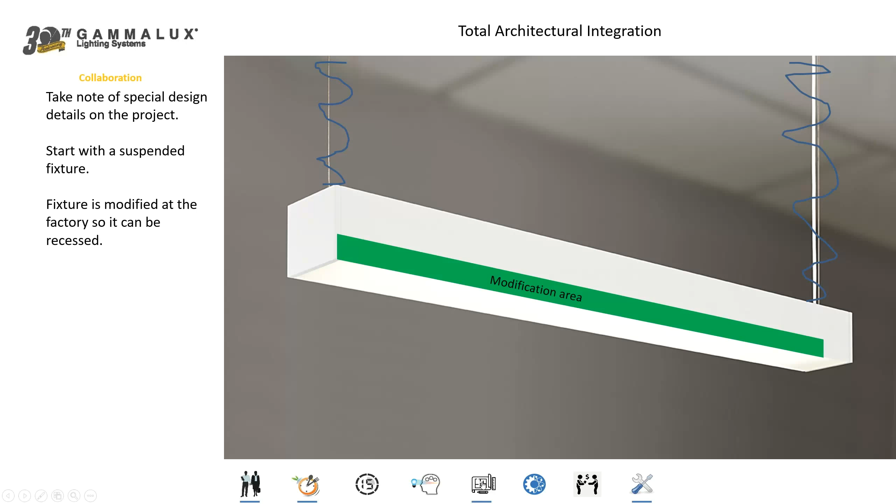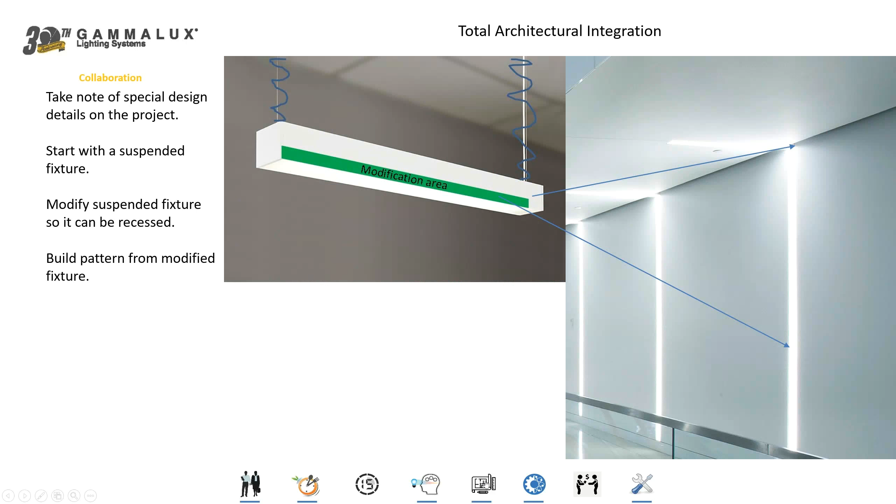And so now, when this pattern of fixtures is installed, the portion of the fixture that's visible inside the 3-inch gap is the nice smooth side on the housing, rather than grooves and flanges and holes and brackets and things of that nature. And of course, when we build the fixtures, we want to be careful for something like this.

So we recommend when you're specifying a pattern of fixtures, don't specify a fixture to be recessed in the wall and a fixture to be recessed into the ceiling, because this is something that you're going to end up with similar to this, where it's up to the contractor to try to figure out how everything goes together.

What we do, instead of providing two distinctly different fixtures, we actually provide an L-shaped fixture that comes up the wall and comes across the ceiling about 6 inches or so. We make that as an L-shaped fixture, like a hockey stick, at the factory, out of that modified suspended fixture.

And then about 6 inches away from the wall, that's where there's a nice, very simple butt joint that the installing contractor will work with in order to finish off the pattern of fixtures. So we're going to give the contractor the most simple form of installation possible while still maintaining the original design intent in the space, while also avoiding the problems of using a product that should not be visible on the sides of the fixture.

So again, total architectural integration requires a lot of collaboration with us, the specifier, and of course the installing contractor as well.

Now, when we're dealing with very complex patterns of fixtures, you can see here in the reflection in the glass, this is one pattern of fixtures weaving its way through the entire building, through the whole floor of that building. If you think about this big complex pattern, obviously there are a lot of parts and pieces associated with it, but we don't want to leave the distributor or the contractor in the position of having to order and figure out all those parts and pieces.

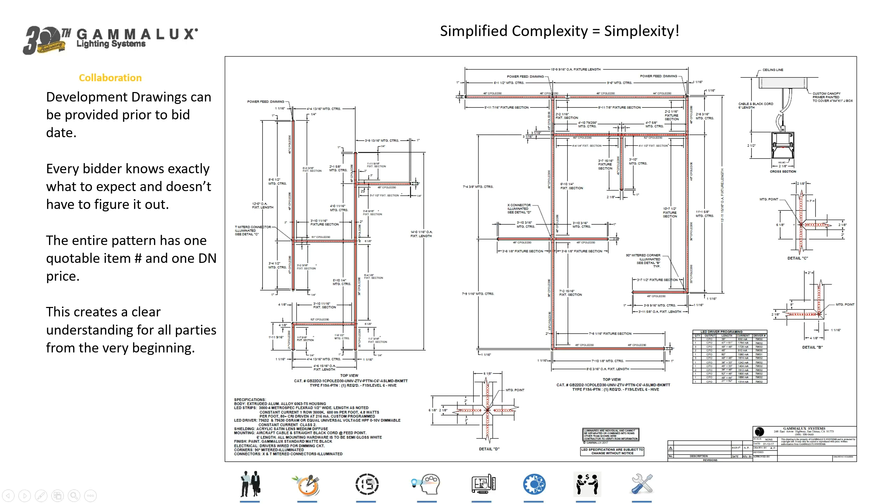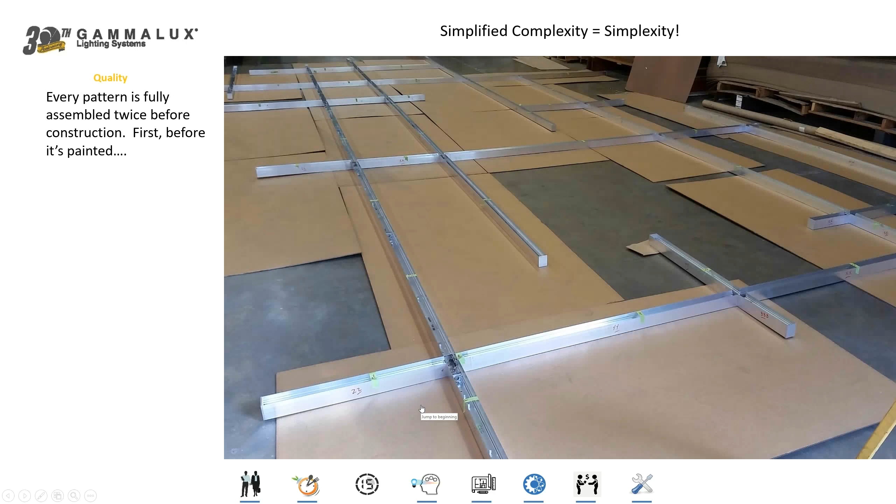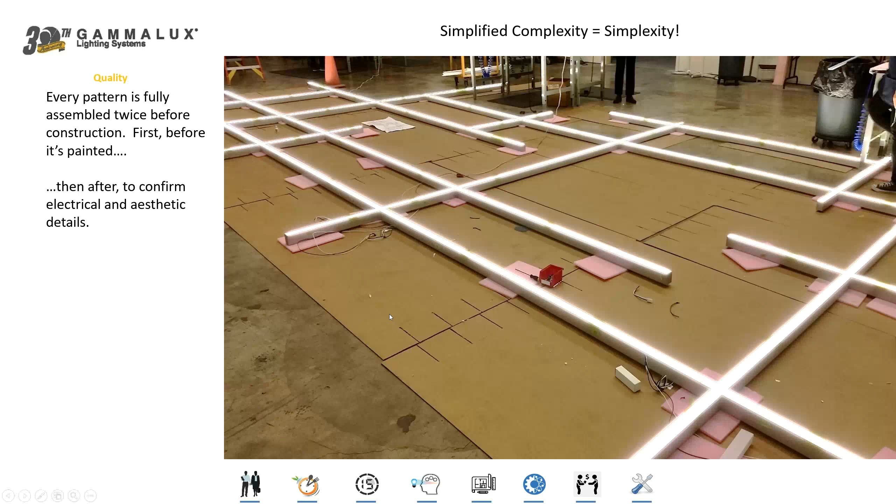Now, everything we build at Gammalux is actually fully assembled twice. First, before it's painted, to make sure all the joints line up properly, all the locking mechanisms work the way they're supposed to, all the dimensions are correct. Then we take the entire pattern apart, paint it, put in the electrical, and reassemble the entire thing, checking all the circuits, all the battery packs, making sure the housings are painted consistently from one housing to the next, and making sure the lenses are fully illuminated. We're checking not just the performance characteristics, but also the aesthetic characteristics of these patterns of fixtures before we pack and ship them. So we're very thorough in our methods.

Now, if you want to have fixtures embedded into the walls, usually you don't want to see that visible flange that goes around the fixtures, that visible framework, if you will. So you specify what you call a flangeless fixture. Well, the flangeless fixtures really do have a flange on them, but they're a mud flange. It gets mudded over and painted so you can't see it. And we have the same thing as well.

But we have an element in our mud flange fixture that nobody else has, an expansion gap. We include an expansion gap of about a 32nd of an inch as part of the construction of our fixture to separate the housing from the mud flange. The reason for this is because when the lamps come on, they're going to create a little bit of heat, and this is going to heat up the housing in relation to the surrounding wall, and any material that heats up expands. So by having an expansion gap separating our housing from the mud flange, whether the housing expands or even if the walls expand, the two won't be putting pressure on each other and creating cracks surrounding those fixtures. This is why we operate the way that we do, why we use the kind of components that we do, to ensure the aesthetics are good for the duration of the lifespan of that building.

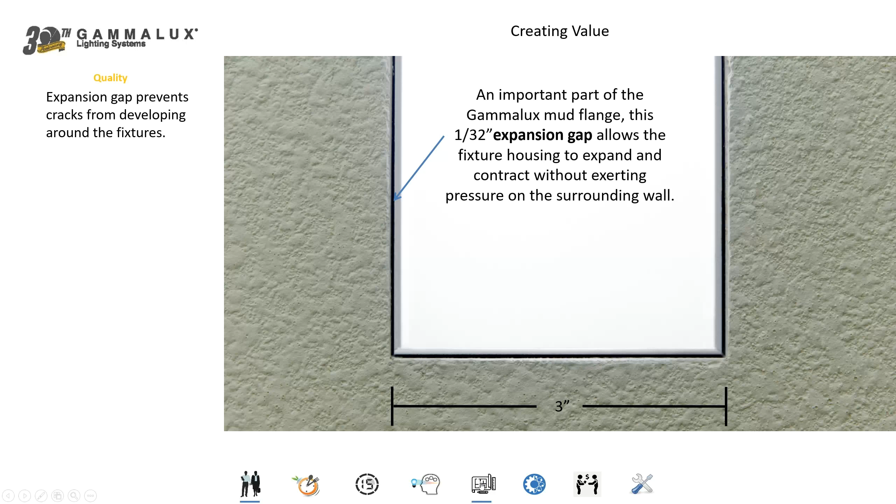Now, this is not a back box or something the installing contractor has to figure out on their own. This is our own construction, so it's not something they've got to try to figure out how to put together.

Now, normally speaking, we would put our mud flange around all four sides of our fixture if it was ordered with the mud flange. But the problem with that is you would see the mud flange in the gap between the fixture and the mirror, and obviously that's not something you want. So now it would be the installing contractor's responsibility to pull that mud flange off the bottom of the fixture, fill in the holes he's created, and then try to find the right color of touch-up paint to fix the mess. And certainly that's something we want to avoid.

So with proper collaboration with the designer, when we find out there's supposed to be a half-inch gap between the mirror and the fixture, all we'll do is put our mud flange on the top and the sides of the fixture, but not the bottom. By doing that, we modify the fixture appropriately for that particular job, and we do those modifications at no additional cost.

Now, if we're building fixtures all the way around all four sides of the built environment, obviously we have to have exact field dimensions for that kind of thing. We quote to CAD or designed dimensions, but we do not build to designed dimensions because we know the walls will not be built to designed dimensions.

Once the stud framing is up, the contractor knows what the thickness of the gyp is going to be, and then they can extrapolate what that corner-to-corner dimension will be, and that's the dimension that we need on our signature-approved shop drawings before we go into construction of these fixtures.

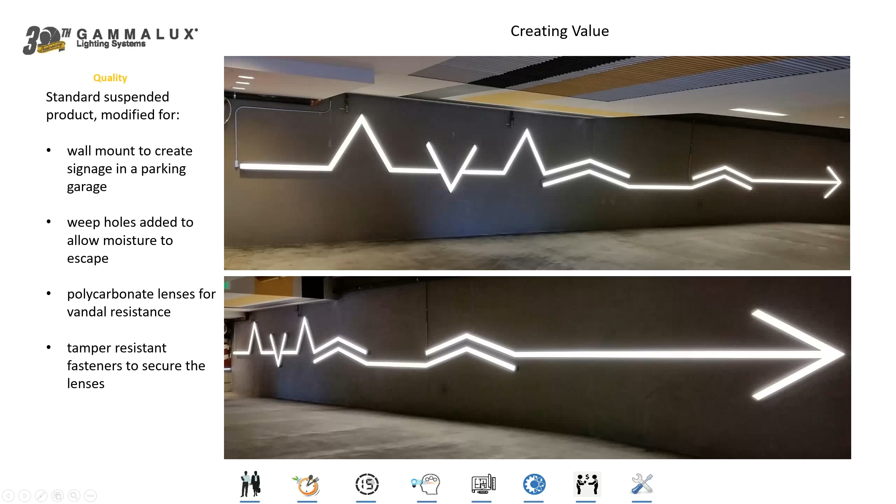All of our fixtures can be built for individuals, in patterns, or in continuous runs. Obviously they have to be ordered that way so we can put the right components into the ends of the fixtures. But when you specify a run of fixtures for continuous run illumination, we're going to let them be continuously and fully illuminated.

There aren't any shadows in the middle where two different housings were joined together and there's a gap in the LEDs, or maybe even shadows at the end. We don't do that kind of thing. We always fully illuminate our continuous runs of fixtures.

To my knowledge, we are the only manufacturer left that can actually make one housing up to 24 feet long, all in one piece. I say the last manufacturer left because a lot of manufacturers used to be available to do this kind of stuff. But as they get bought up by the conglomerates, very soon all their special characteristics and capabilities go away, and they just become another one of the herd.

So Gammalux is a family-owned company, privately owned. We're not for sale, and so we still have all these great capabilities that help you to do creative things.

Now, in a case like this where you're working with a tall rectangle, there's a lot of rigidity to that kind of housing, so we can support that entire 24-foot housing with just two support cables. So you're cleaning up the ceiling system, and obviously it's very aesthetically pleasing. You're eliminating any gaps or light leak because there is no multiple housings being joined to create gaps and light leaks.

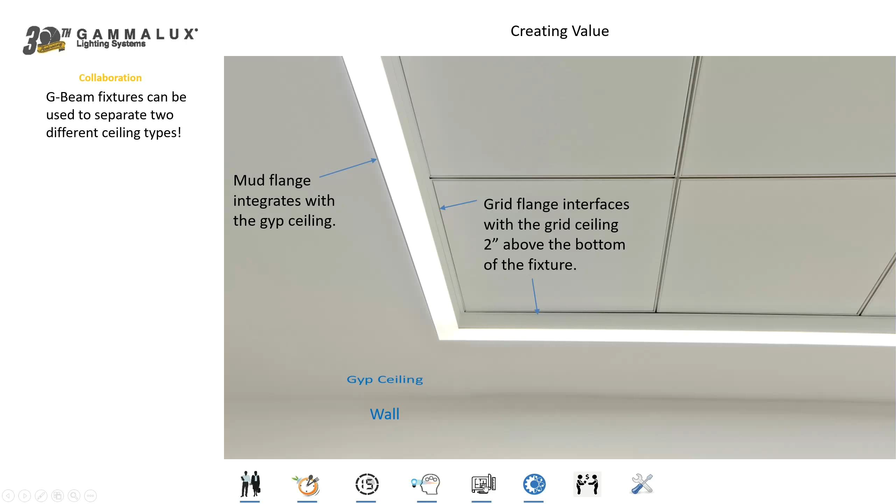We can make wayfinding applications as well, where we're coming up the wall, across the ceiling, and then shooting down the corridor, also at any angle. You saw that AVA pattern where we're doing multiple different kinds of angles, not just 90 degrees and 45. So we're not bound to just those two angles.

Now here's an application where we took our fixtures and actually created steps in the ceiling, coming up to the center and then back down to the other side. If you think about a step ceiling, there's a lot of complexity probably involved in stuff like that, certainly a lot of hands in the cookie jar because everybody thinks they're going to make a lot of money on this custom application, and that's just not. It doesn't have to be that way.

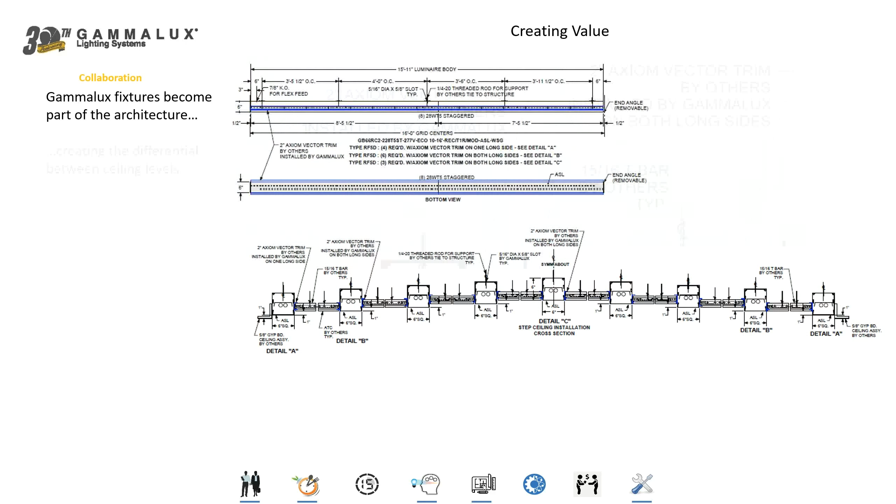What we did here is we found out what the ceiling system was. This is the Armstrong Axiom ceiling system, which uses an extruded aluminum C-shaped channel that gets installed up against the walls at the ceiling line. Then the grid snaps into that C-shaped channel and slides along until it's in the right position, and then they drop in the tiles.

So what we did is we got a hold of that C-shaped channel called the vector trim, and we attached that vector trim to the sides of our fixture at the factory. Of course, everything was cut to the same length and painted with the same paint, so it all looks like one comprehensively designed unit.

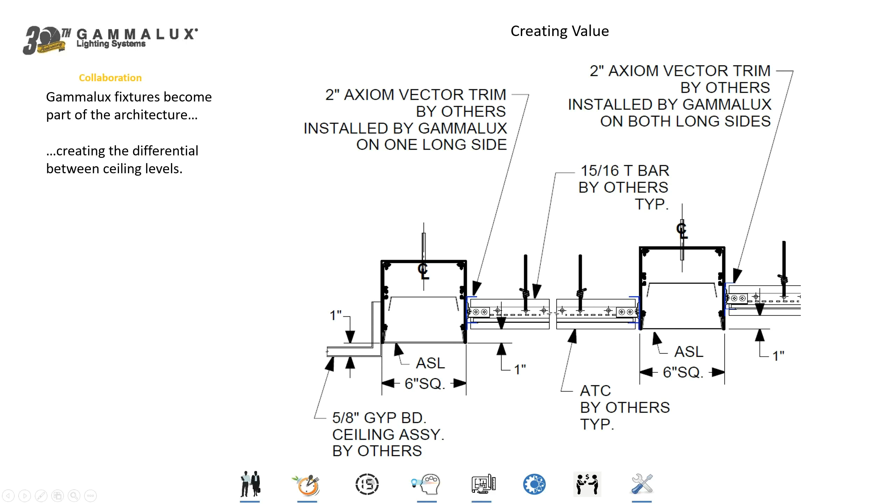Now, when the fixtures arrive on site, the installing contractor supports those fixtures and suspends them at the right locations, at the right height, and then the ceiling contractor gets in and just snaps the grid right into the sides of the fixture. The grid is supported independently, the fixtures are supported independently, but they're all interfacing with each other in order to create a beautiful installation without any of the custom dollars associated with a custom step ceiling.

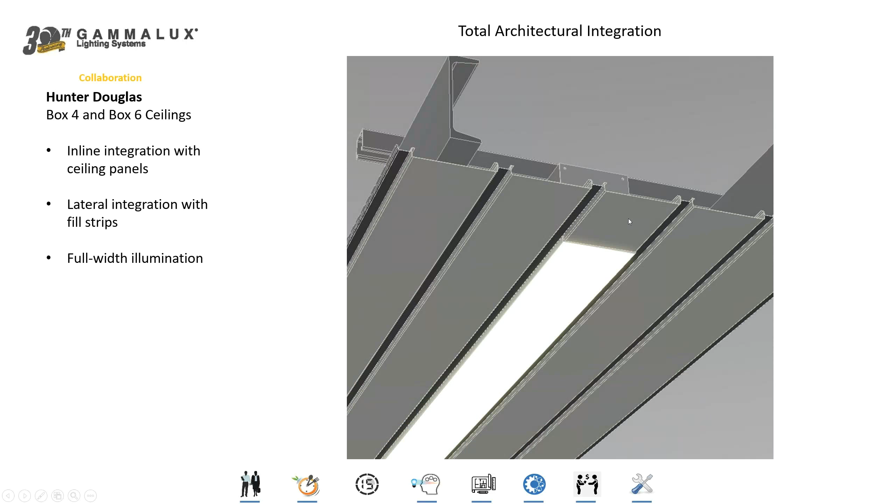This is the Hunter Douglas Box Series metal ceiling system where they have nominal 4-inch and 6-inch panels. We've made our fixture the same width as the panels, and we have a joiner spline in line with our fixtures so it interfaces with the cut panel at the ends of our fixtures. So the fixture itself becomes part of that ceiling system in a fully integrated way.

We actually use the same brackets on the top of the fixture that the panels require so that everything fits together in a kind of a cohesive and complete way.

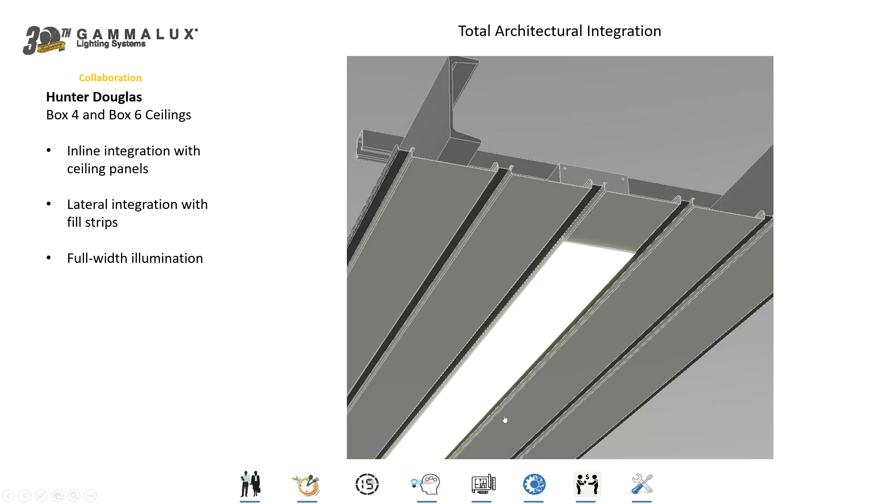Obviously, you want to avoid this kind of thing, these one-size-fits-all solutions that don't really work out, because the truth is one size only fits one, and the rest are compromises. Gammalux wants to understand what kind of ceiling system you're using and even what kind of grid you're using so that we can build our fixture to the proper dimensions to avoid this kind of aesthetic problem.

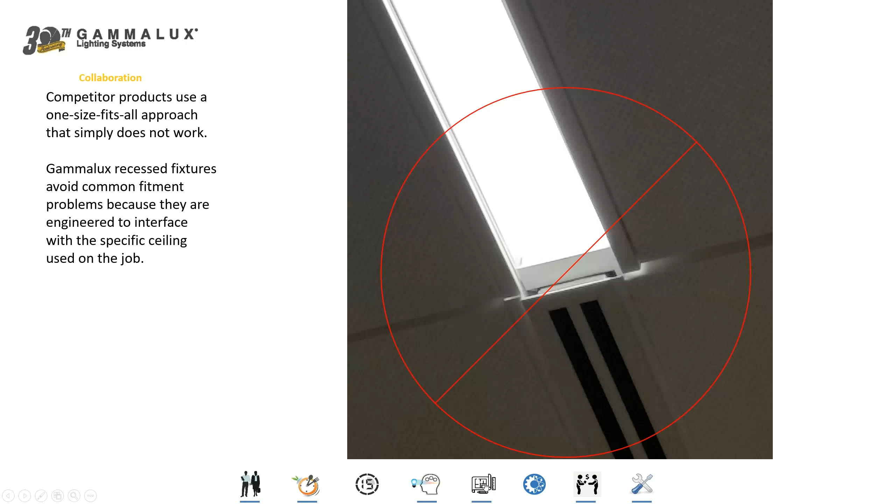Now, we offer fixtures of multiple widths, and if you'd like to use fixtures of different widths on the job site, you're also going to get different apparent brightnesses. So what we can do is offer to custom program the drivers in all the fixtures to equal them out, so you get the same apparent brightness throughout the entire job.

We will custom program our drivers either for a certain level of output that you want or for wattage restrictions that you have to comply with, and we do that custom programming at no additional cost.

So we can make all of our fixtures suitable for damp location, but we do not offer wet location or natatorium or indoor pool type fixtures, because the chemicals will just eat right through the housings, the drivers, the LEDs and such. So those are really the only two things we don't do: wet location and natatoriums.

Now, wall washing is a very important part of good design. Obviously, if you have an object wall, you want to illuminate that properly. So we have a kick reflector on the bottom of our wall wash fixture that actually illuminates all the way to the top of the wall.

This eliminates that shadow that most of our competitor products have. Also, that kick reflector acts as a glare shield so people inside the room can't look into the fixture itself. You have to actually be below the fixture in order to see into it.

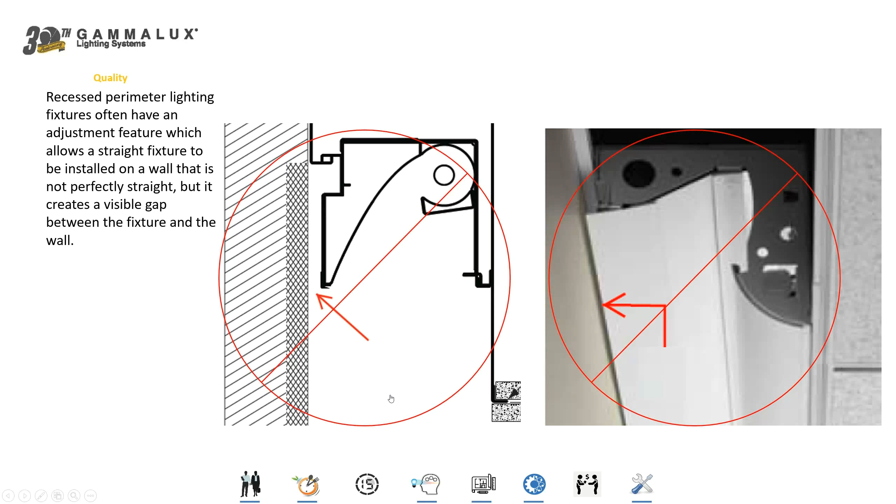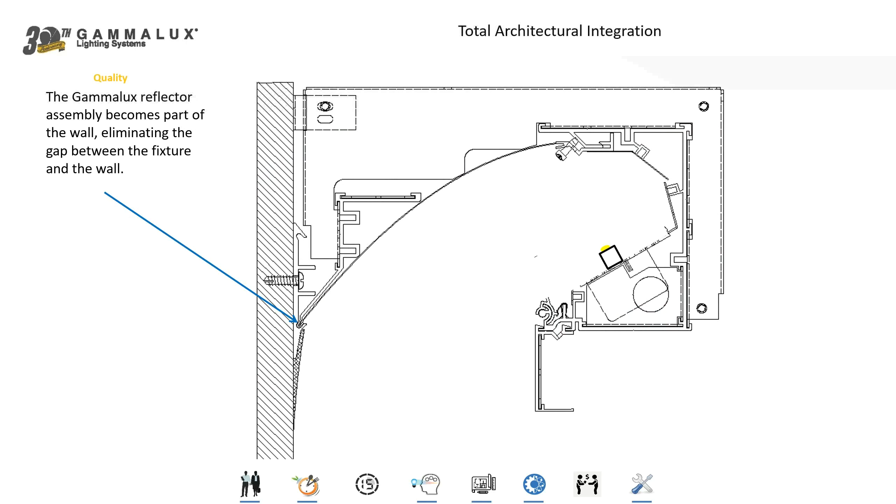So what we've done is developed what we call a mud flange for the perimeter series. This mud flange gets mudded over, and you can see that it's attached to the face of the wall just above the ceiling line, a couple inches above. That mud flange has a groove in it ready to receive the reflector assembly from our fixture. This eliminates that gap that's often, all too often, visible between the back of the fixture and the wall.

We have two types of illumination. We offer grazing illumination and ambient illumination for two different purposes. Grazing illumination shoots light straight down the wall, so you get shadows on even the most shallow texture in the space. But be very careful.

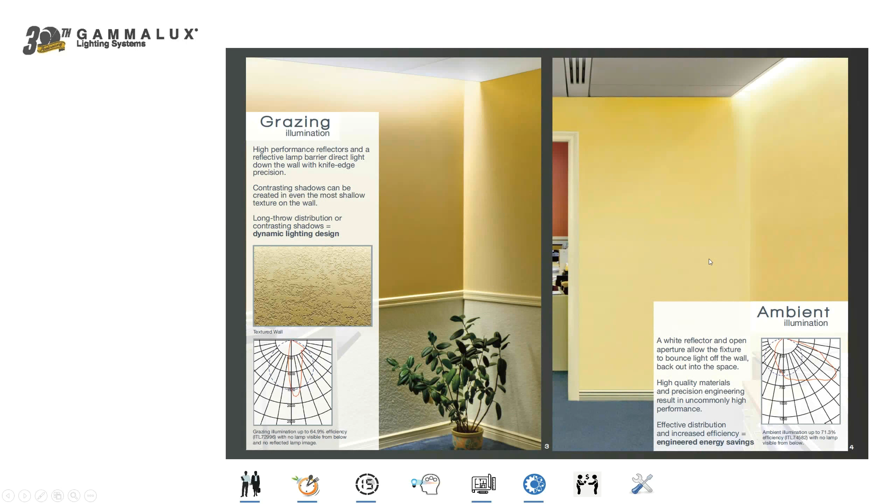Do not use our grazing illumination fixture on a flat wall unless you know that it's a level 5 finish. Obviously, if there's texture on the wall, you're going to create all those beautiful shadows on that texture, the brick, the stone, and such. But if you've got a flat wall that you don't think is going to be perfectly flat, do not use our grazing optic because you are going to highlight every dimple and pimple on that wall. Instead, use our ambient illumination fixture, which uses the wall as a reflective surface to bounce light back out into the space rather than shooting light straight down the wall.

We've also reintroduced the round fixture back into the world of lighting. It was gone for about 15 years or so because everything turned to squares and rectangles. But styles change, and certainly geometric shapes like circles are never going to go away. So we've reintroduced our round fixture.

We've given it rotation capability so it could be aimed wherever you like in the field. Each independent section can also be separately rotated from the others, so you can have some facing left, some facing right. They're fully rotatable 360 degrees, so you can aim them pretty much wherever you like in the field.

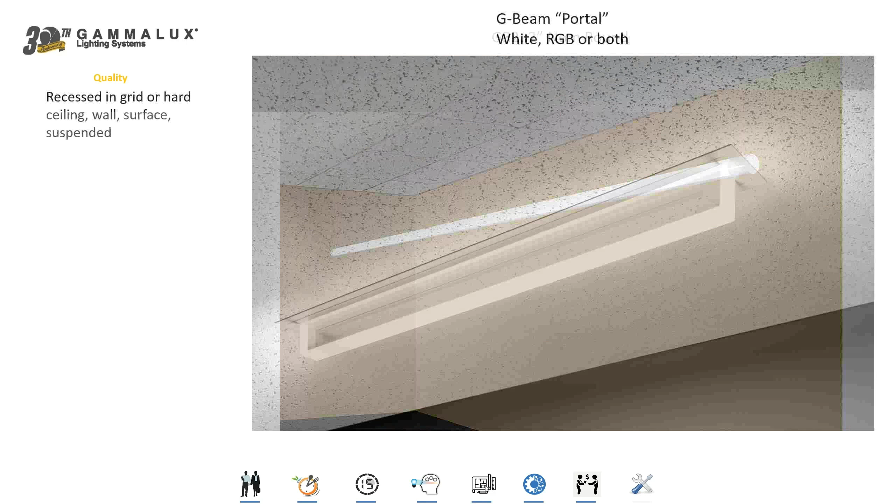Our G-Beam Portal fixture uses the same G-Beam housing I've been talking about, which has all this great integration capability into the architecture. But rather than having that standard white lens on the bottom of the fixture, we've replaced that with a backlit acrylic, which is a very bold type of design.

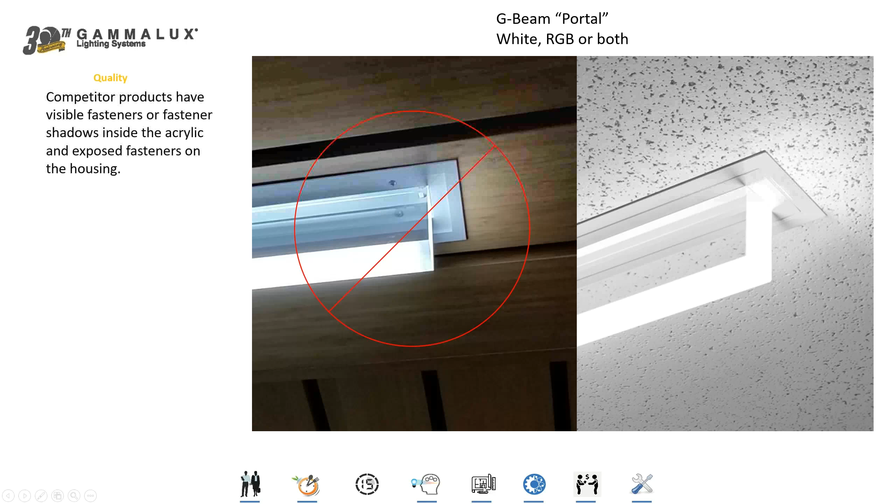This fixture can be used as individuals for a very dynamic type of installation or in continuous runs. When used in continuous runs, there will be a small gap between the acrylic blocks, but that gap is consistent throughout, so it's not really an eyesore.

We can install these fixtures in grid, in gyp, any kind of grid, wood ceilings, metal ceilings. We can even integrate into furniture systems. So a lot of capabilities for mounting these products.

All of our LED fixtures offer RGB function on DMX control, and if you want white, we would build that in a separate circuit so that you have full output white rather than that dim kind of RGBW white.

Also, the acrylic blocks can be laser etched, so you can create signage for your client even if they don't have a signage budget. This one element can be built into a complex pattern of fixtures using the standard lens, so you only use this particular element exactly where you want to draw attention to it in the space.

We have 13 standard finishes in all of our fixtures, and we also offer wood grain finishes in all of our fixtures as well. There's a bit of an adder associated with that, and you're only going to use it sparingly, only in the places where you really need this kind of aesthetic.